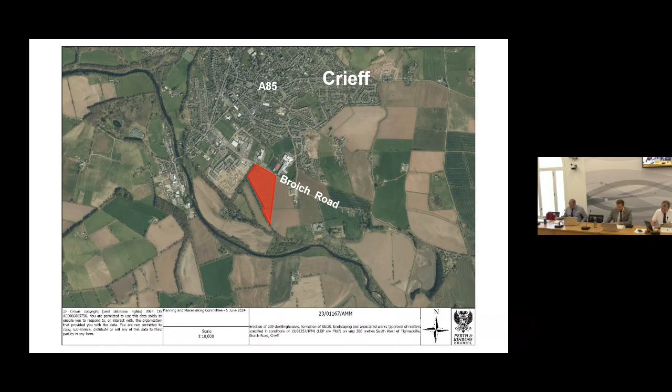Next slide, please. Here we can see the location of the site, which lies to the south of Broich Road and is predominantly surrounded by agricultural fields. To the north and northeast of the site, you can see Crieff Primary School and Crieff High School, and to the west you can see the Ogilvie Homes development known as Drovers Gate. This Ogilvie Homes development also forms part of the same mixed-use allocation in the local development plan.

Next slide, please. We now have an extract from our LDP showing the mixed-use allocation referred to. The site, known as MU7, is the purple area to the south of Crieff. The proposal before you today is fully within this allocation. Next slide, please.

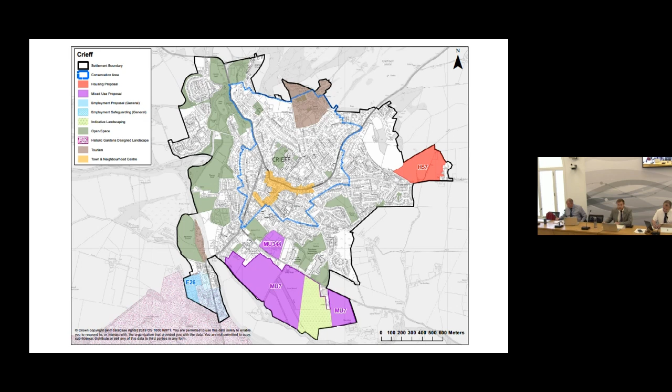This plan shows the approved in-principle master plan. The orange area to the left is the Ogilvie Homes development, and the orange area to the right is the proposal before you today. The green area is the scheduled ancient monument, which will not be developed upon as part of this proposal. The proposal before you is fully within the boundaries of the previously approved in-principle application.

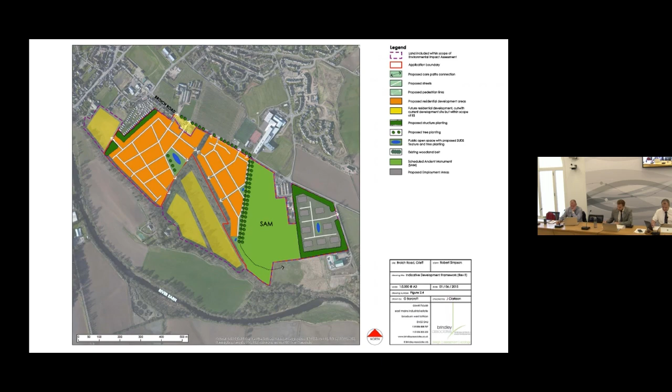We now have the proposed site plan. Here you can see the general arrangement proposed. Of the 209 units, 157 will be for private sale and 52 will be affordable units. The development also accommodates a diverse mix of 2, 3 and 4 bedroomed homes.

Zooming in on the northern part of the site now, you can see here the 2 vehicular access points onto Broich Road and a further vehicular access connecting to the Ogilvie Homes development to the west. You can also see on this plan the extent of green space and tree planting proposed.

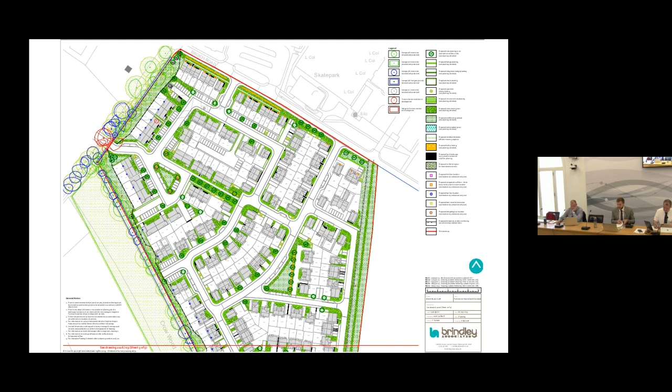Moving to the southern part of the site, here you can make out the location of the SuDS basin and some more of the landscaping.

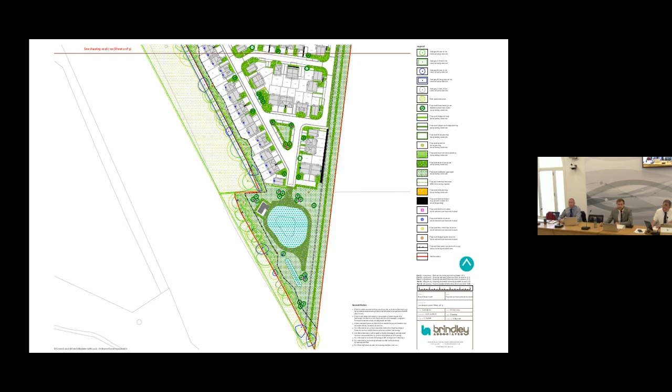Here we can see some of the boundary treatments proposed, which include walling with feature pillars. This will help to ensure a positive streetscape.

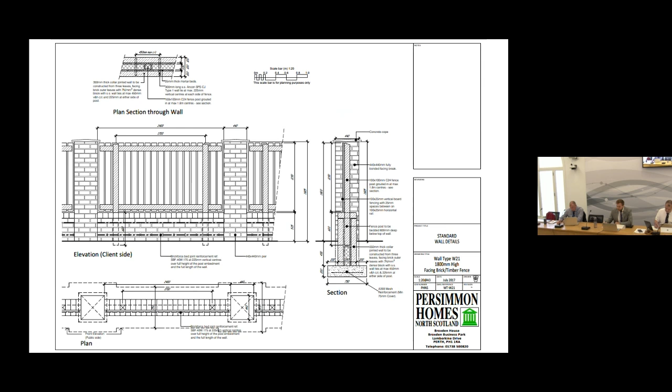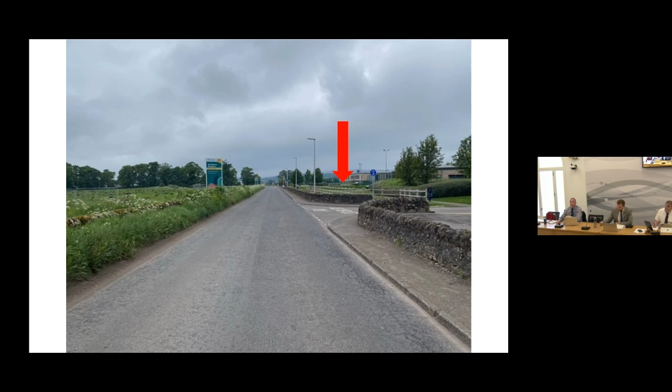This next image shows Broich Road, again this time looking back towards Crieff. To give you your bearings, Crieff Skate Park is shown by the red arrow. Please note that recommended condition 3 of the consent requires a number of upgrades to this road, including the widening of the carriageway to 6 metres, the installation of a toucan crossing, and a footway along the southern boundary with associated bus stops.

Thank you, Convener. That now concludes my presentation. I will leave members with the proposed site plan for reference.

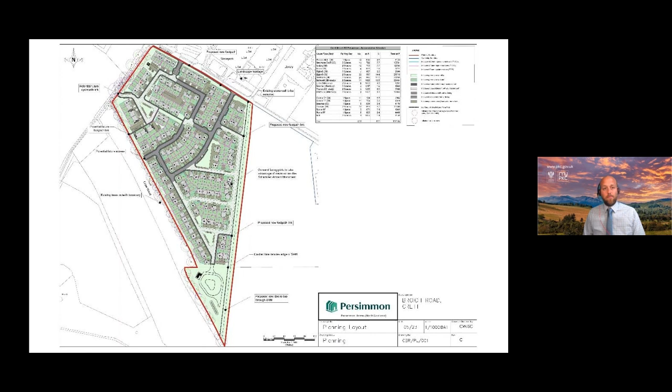Okay, final question for Lachlan. In the internal consultation, it mentioned a number of plots, the Warriston plots, and said that the parking provision needed to be adjusted to comply with the National Roads Development Guide. Can you tell me whether that's been done? In relation to that, there was discussion with Persimmon regarding the parking provision on site and the visitor parking provision there, and with the revised design that came in, we are now satisfied with the level of car parking that's been provided on site.

Okay, thank you. My final question is, there's a pathway to be put along the side of Broich Road, I understand. Will this connect all the way along Broich Road from the site right into the town, or does it stop in places?

I'll answer that. In relation to the footway along Broich Road, it will be provided along the frontage of the Persimmon site, and it's also intended that it would be provided along the Ogilvy site. As I mentioned, there is Broich Drive in between at the moment, and there'll need to be further discussion on how the footway is provided between those two points. Notwithstanding that, what we're looking for is a toucan crossing to be provided from the Persimmon site to the northern side, which will provide access for walking and cycling, and then any informal pedestrian crossings with drop curbs provided at other points along the frontage of the site, so that there is connectivity into the shared use on the northern side, which will provide linkages to the schools, Aldi, B&M, and then into the town centre as well.

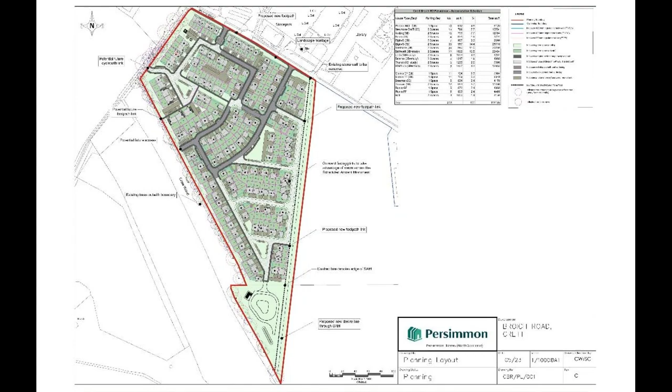Yes, if we worded the condition in a way that prior to commencement of the development, the developer must submit a scheme to the council for written agreement which shows life-saving equipment and/or a fence, and we could take the evidence there and justification and take that into consideration if members were in agreement.

Can I ask members if they have any comments on the report?

Councillor Cuthbert: Yeah, I was going to ask about the NHS situation. I think in a way we really need to look at this seriously to consider for future applications. What we're doing here is we're knowingly consenting a development that's going to put additional strain on a system that's already under strain. And I really think we need to be looking at that and thinking about how we deal with that in future with big, larger developments like this one.

Thank you for that. Councillor Braun: Yeah, thanks, convener. But Councillor Cuthbert's got in a bit before me again on this one, so I'll just reiterate what he's saying.

I think in this particular instance, we are aware there's a strain, and Mr. Pennington said there's another phase to go. I really do think we need to be on warning now as a responsible planning authority. We have been warned there's pressure, and it's not just here because we know it's everywhere. But I think we're starting to take note of this, and we can't wait for the next LDP 3 to come along. You know, the pressure's there, it needs to be assessed.

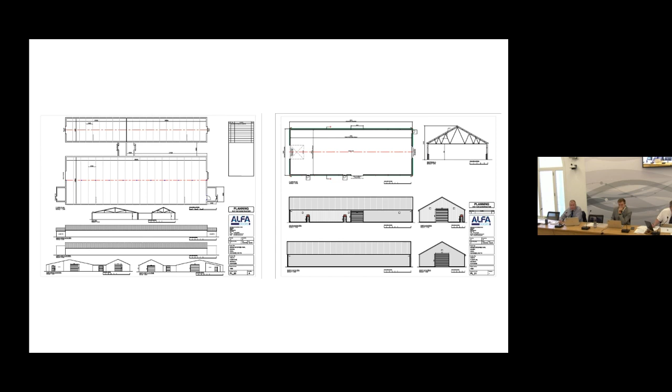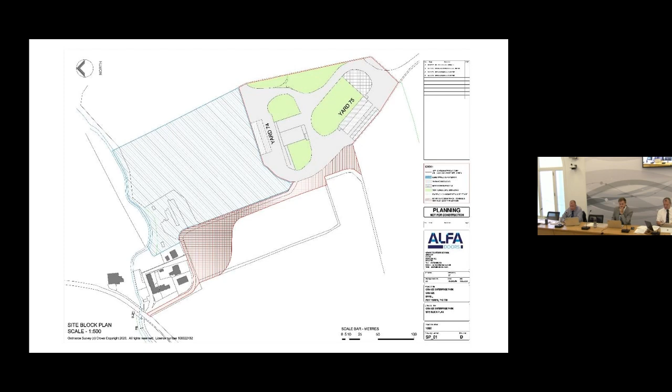These last photographs show the view northwards from the first bend on the access road looking back to the junction with the public road, while the photo on the right shows the junction looking southwards with residential property on the left-hand side. Next slide, please. Thank you, convener. That now concludes my presentation, and I'll leave members with this site plan.

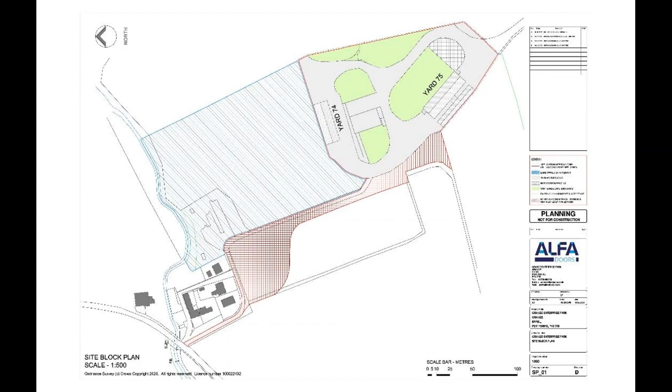Certainly from this perspective, as I understand it, this isn't an adopted highway. This is a private road, but we'd be looking for improvements to it. I can let Carlin come in as well. Thank you, convener. Yes, so we are satisfied with the protection of the public road via the condition for improvements to the junction at the public road, in the interest of road safety. Thank you.

Thank you for that. Any further questions? No further questions. Can I ask for a motion? Councillor Braun. Yeah, thanks, convener. I'm happy to put a motion to move the paper as is. The only slight thing I would ask is perhaps we could change the timings on the Saturday to 5 o'clock, so it's 7 till 5 on a Saturday, no work on a Sunday, 7 till 7 in the week, if we're happy with that. That would be my motion to approve with that slight change. Councillor Reid, you want to second? Happy to second Councillor Braun's motion.

Thank you. Can I ask for an amendment? No amendments. Do committee have any comments on the report? No comments. Okay. Therefore, planning permission is therefore granted. Thank you very much.

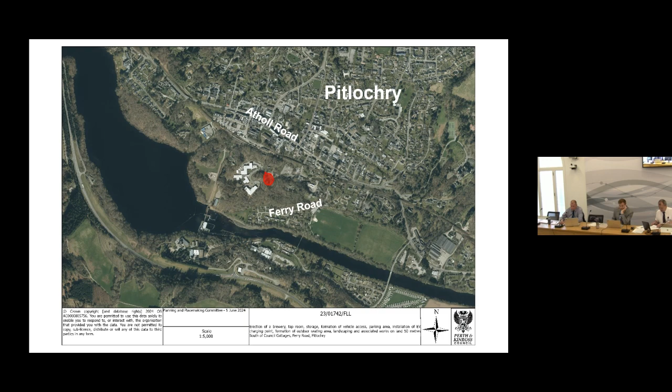Next slide, please. We now have a slightly more zoomed in aerial extract, which shows the cleared nature of the land in question, directly above where it states site on the slide. To the west is the Balhousie Pitlochry Care Home, which is located at a lower level, with the Pitlochry Community Hospital and Atholl Medical Centre also located to the west.

In terms of residential property, immediately to the north of the site are 1 and 2 Burnside cottages, while the Bobbin Mill site, also known as Tombald Cottages, are to the east. Although a short distance to the northeast is the Ferry Road public car park, through which pedestrian access can also be obtained through to Pitlochry Railway Station and to the town centre.

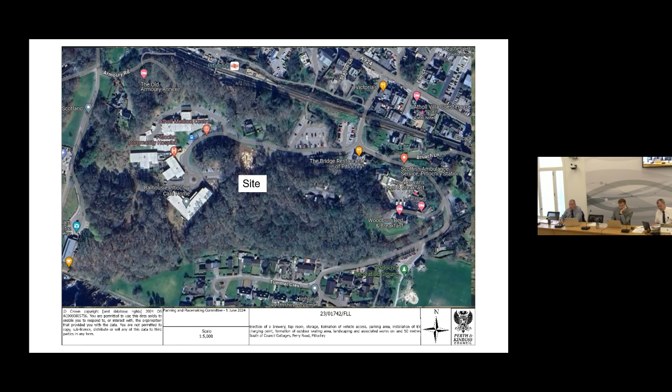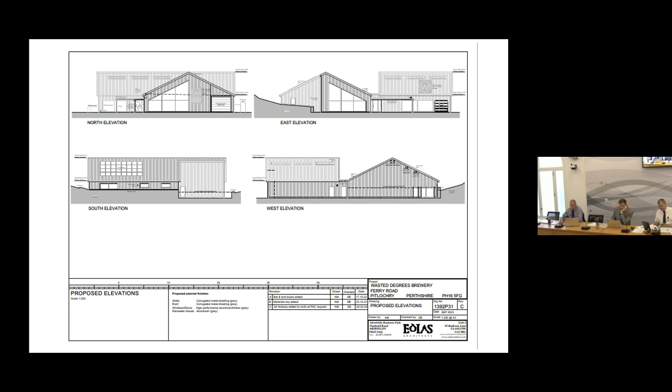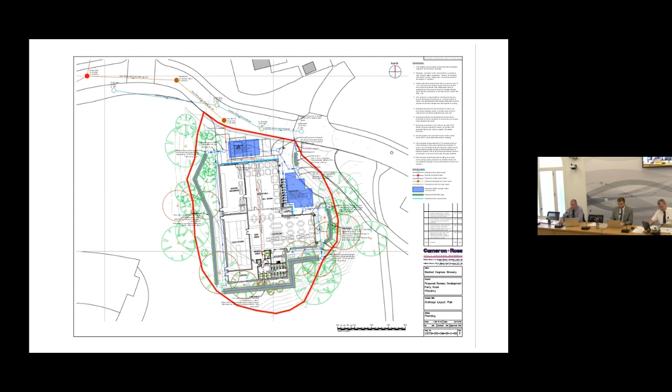Next slide, please. The drainage plan is now shown, and it shows the provision of cellular storage crates for surface water runoff. Filter trenches are also proposed to the adjacent slopes, and foul water shall be connected to the existing public sewer in Ferry Road.

Next slide, please. This slide shows 2 artistic visualisations of the proposal, with the one on the left taken from the access to Tombald Cottages, also known as the Bobbin Mill site to the west, with the image on the right shown from the site access from Ferry Road.

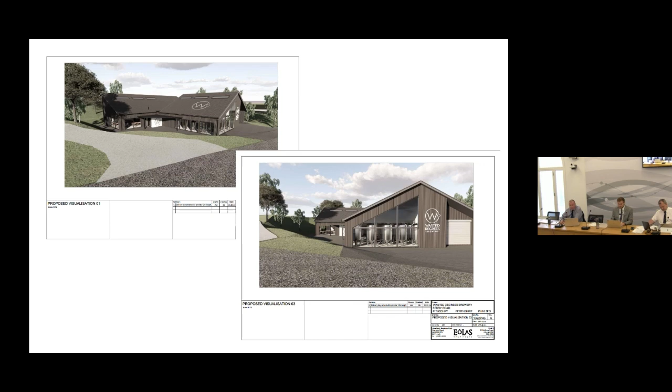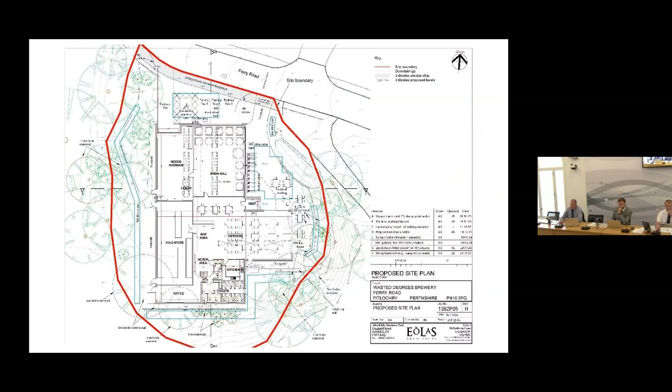That now concludes my presentation, and I return to the site plan.

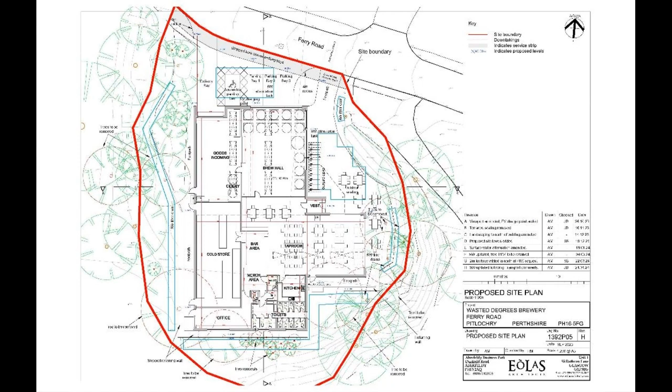Okay, we'll move on to the next local application, and that's for part change of use and alterations to a building to form 10 short-term let accommodation units at 52 to 56 High Street, Kinross. And to speak to the report is Mr. Williamson. Thank you very much, Convener.

The third local item on the agenda today relates to the part change of use of the first and second floors of space above Green Supermarket on the High Street of Kinross. The intention is to subdivide the space to create a total of 10 short-term let accommodation units in this town and neighbourhood centre site. This application has been referred to committee in light of the receipt of 7 letters of objection, including 1 from Kinross Community Council. The matters raised are referred to in paragraph 27 of the report, although these largely relate to traffic and parking, loss of privacy and overlooking, drainage, density of units, and management of the units going forward.

I'll now take members through a short presentation to detail the proposals. Next slide, please.

Here we can see the location of the site, which lies at the junction of Station Road to the north and High Street to the east. The latter is characterised by a mix of commercial units, generally at ground floor levels, while the former has a dental surgery near the High Street junction and residential properties as you travel westwards. To the south of the site are the rear gardens of residential properties on Piper Row and Swansacre.

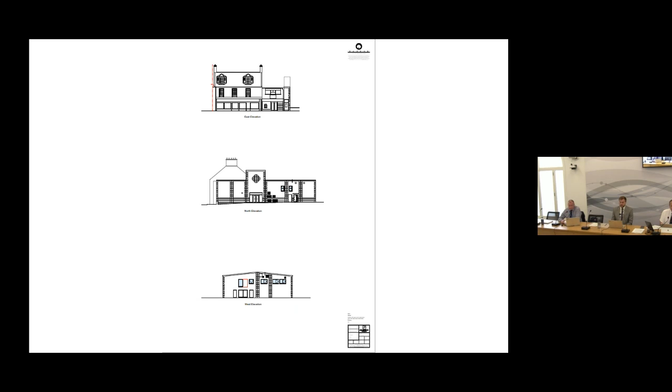Thank you, Convener. That now concludes my presentation.

Thank you, Mr. Williamson. Can I ask if the committee have any questions for the... Jeez, let's put my teeth back in. Any questions for officers? Thank you.

Thank you, Convener. The application is titled as an application for 10 short-term let units, and it's assessed on that basis. I note, however, that there is a communal area shared between the occupants of the units, and also that there is no space for any staff, whether cleaning staff or staff that might supervise residents and ensure there's no issues with noise or antisocial behaviour. So my question is, at what stage would we consider this to actually be an unstaffed hotel as opposed to a cluster of short-term lets? And if we did classify it as an unstaffed hotel, would the appraisal still be the same, and would we still be looking at a recommendation to approve today? Thank you.

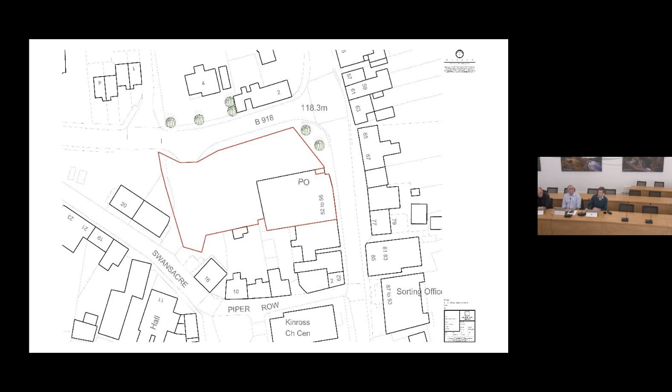Thank you very much, Bailie. First and foremost, we have to assess the application on the basis as it's been submitted. So obviously they have applied for short-term let accommodation units. We are considering it on that basis. Obviously, we have our parallel licensing requirements for short-term lets, so the management, operation of that, potential antisocial behaviour etc. would ultimately be controlled through that process. We aren't looking upon it as a hotel per se. Short-term let accommodation is separate and distinct, so we are considering it on that basis and not as anything else.

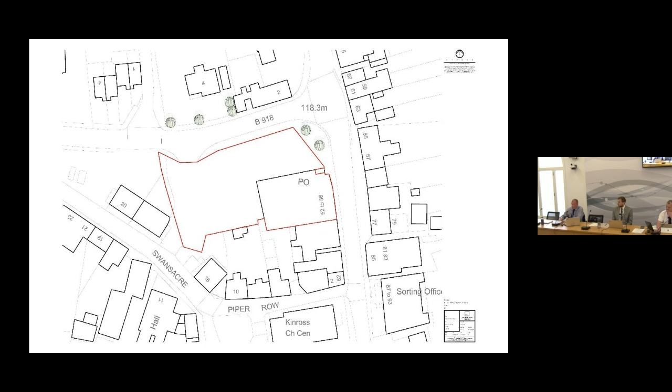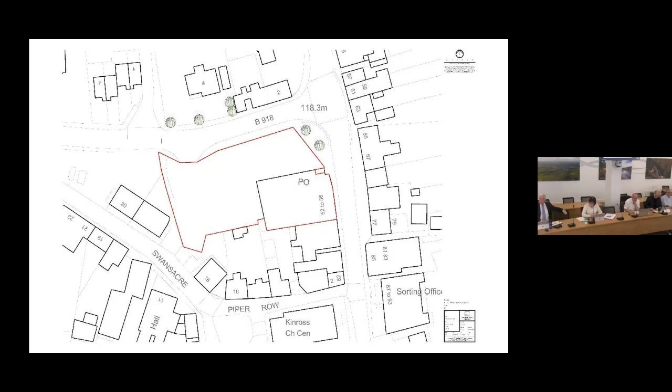Councillor Cuthbert, I'll take the first question. Thank you, Convener. It's for transport planning. In principle, this application takes 10 parking spaces in Kinross. The parking in Kinross is extremely tight, and it's getting increasingly difficult to park there. So I'm just wondering, are we comfortable with the fact we're losing 10 parking spaces? Is it something we can do something about?

Lachlan, can you answer that? Yep, thank you for the question. In relation to the private car park operated by Greens, what I would hope is that whilst they've shown 10 bays being allocated for the short-term lets, it's unlikely they would be occupied the whole time someone is there. So potentially, if someone was staying overnight, they might arrive at 5 o'clock and leave by, say, 9 o'clock in the morning, which would then leave those bays available for general members of the public to use whilst visiting Greens throughout the rest of the day.

Thank you. Bailie Williamson. Thank you, Convener. My question is about, whilst I accept the report's recommendation that the 10 units are not going to impact significantly on housing within Kinross, I'm just concerned, has there been a housing needs analysis done within Kinross to back up the fact that we're maybe losing these properties? And secondly, it's around the developer contribution. If this was 10 houses, I would expect a developer contribution, and short-term lets seem to bypass that. Is that something we need to try and resolve as a council, or does that lie more with the Scottish Government perhaps?

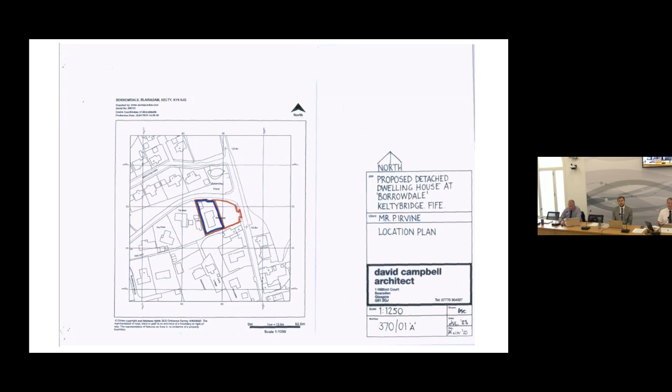We now have the location plan, which shows the relationship of the application site to that of the applicant's land, the remainder of which is outlined in blue. As members shall note, the red line boundary area is comparable to many of the wider plot sizes, including those of Middleton Park to the north. Next slide, please.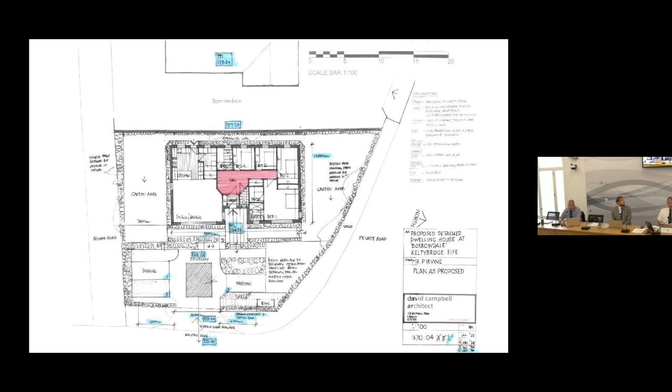Next, we see the detailed floor plan and site plan. It shows the arrangement of the proposed 4-bedroom property, the retaining wall towards Borrowdale, and the provision of 3 car parking spaces and the surface water attenuation crates beneath the driveway. The plan also shows that the existing hedge would be retained and then at the access point also reduced in height. Next slide, please.

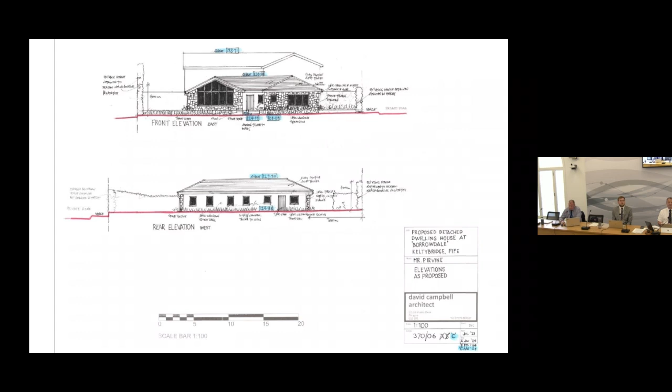Members shall now see the respective front and rear elevations. To the front, the walling would comprise rubble stone walls and white render to the sides and rear. The roof would also be clad with a clay pantile roof. The front elevation at the top also illustrates a notable change in levels from the adjacent dwelling down to this part of the site.

Next slide, please. Next, we see the respective side elevations and site sections. Again, this shows the 2.5 metre retaining wall, which is already in situ, and the hip nature of the proposed roof away from the existing dwelling. It also shows at the bottom how the roof ridge level would be below that of the eaves level of the adjacent listed buildings, and also set relatively far back from Main Street.

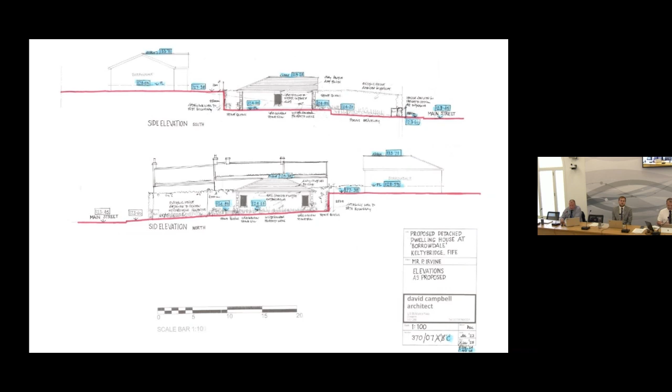Next, we see the images from the south of the site, with the gable of Borrowdale on the left, and just visible in the lower section are the vehicles of the applicant below the retaining wall. The right-hand image is from towards the southeastern corner of the site, looking back towards Borrowdale, and again shows the change in levels between the parts of the wider site.

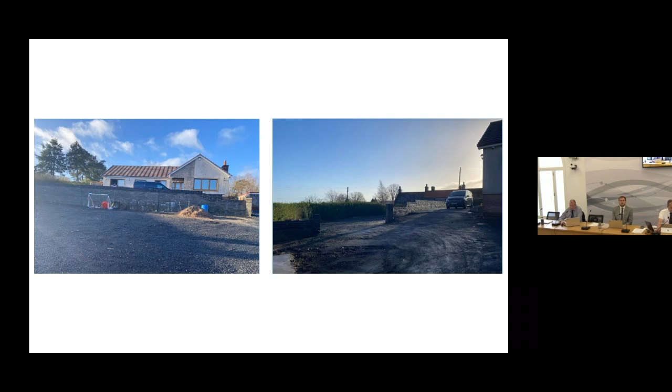Thank you, Convener. That now concludes my presentation.

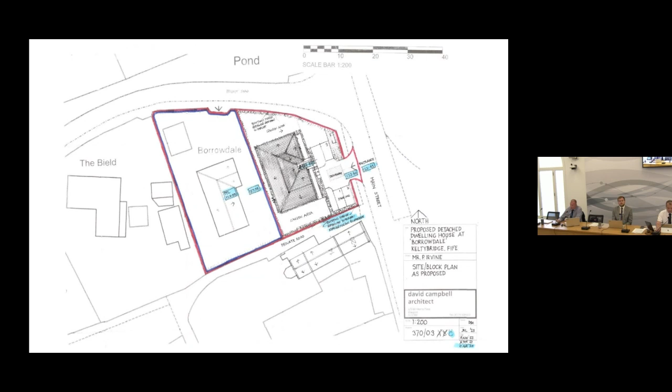Thank you, Mr. Williamson. Can I ask, do members have any questions for officers? Councillor Cuthbert.

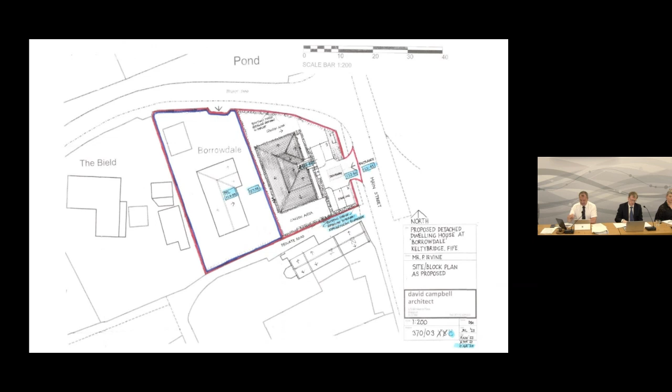Thank you, Convener. The containment wall and the works that have been done below that, is that consented or unconsented? That's unconsented, and obviously they're seeking to regularise that through this application.

Any further questions? No further questions. Can I ask for a motion?

Councillor Cuthbert, point of order. Yes, I was hoping to take a 5-10 minute recess to talk to the legal representative. I'm minded to put forward a motion to refuse, so I'd like to clarify the details of that with him. You okay then? Matt?

Okay, folks, this is us back. Can I ask for a motion? Oh, Councillor Cuthbert, you put forward a motion. That's being a bit cheeky.

Thank you, Convener. Yes, I would like to put forward a motion to refuse. I've got several policies that I think this development breaches. I've got policy 27A, which is to do with the historical setting, policies 1A and 1BC, and policy 17, which is to do with enhancing the character of the area.

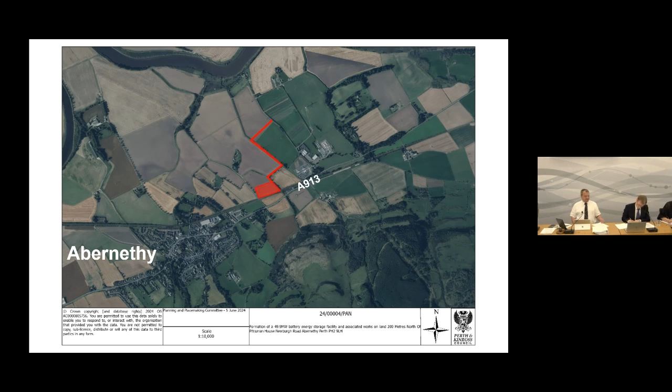Councillor Illingworth: Thank you, Convener. I've got eight comments and I'll work through them very quickly. Firstly, there's a water supply to Balgony farmhouse that goes underneath the site, if that could be taken into account. Its proximity to housing at Elm Bank and Sandylands Grove. Fire risk. Screening, as in vegetation screening. The fact that there's an active travel route proposed to go through the site, and that screening plants should be amenable to that active travel route. The noise of the plant. Am I going too fast? And the fact that it's prime agricultural land, and I'd ask you to consider that there are a total of 7 similar facilities planned in the vicinity of Abernethy substation.

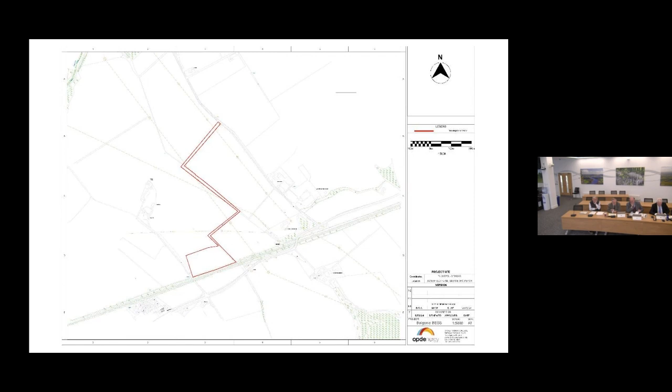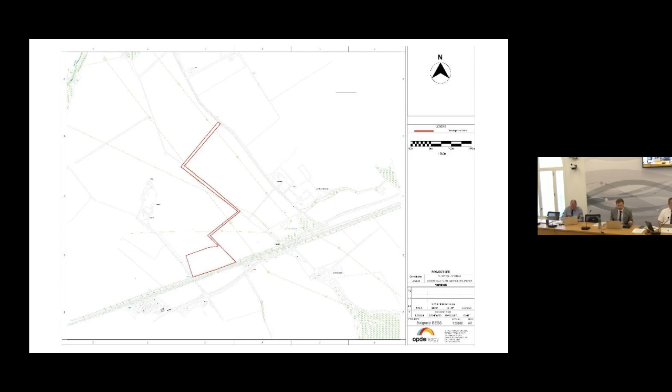Right, thank you very much. So just to confirm, Councillor Illingworth, that is: consider water supply under the site, consider proximity to residential properties, fire risk, screening and vegetation, the proposed active travel route, noise pollution, prime agricultural land, and cumulative impact. Thank you. Any further comments? No further comments. Oh, sorry.

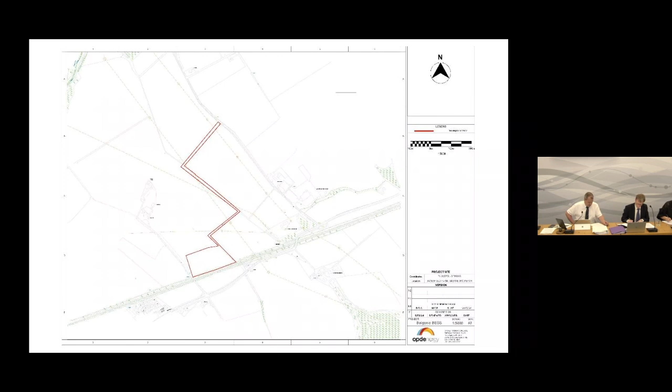Bailey McLaren: Thank you. I would also echo the cumulative impact concern, because there are many in that area going through the process of application. Thank you.

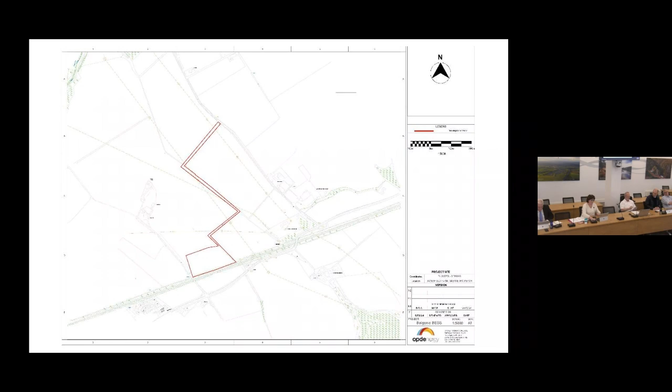Thank you. We'll now move on to the next one, which is the formation of a 49.9 megawatt battery storage facility and associated works at land 300 metres west of Killen. Any comments? No comments.